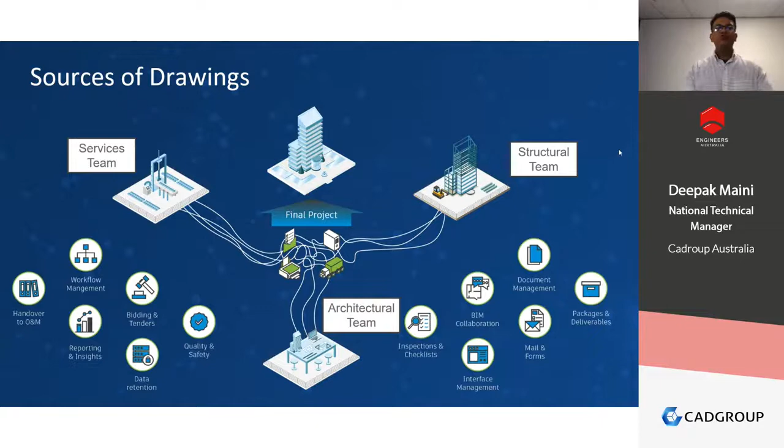The problem is they are not just the final documents. As I mentioned in my intro, construction is a really fluid state—we keep changing things around a lot. So let's say we've got a set of 100 drawings from the services team, whether mechanical, electrical, plumbing, hydraulics, and then the next day we get another set of 20 drawings because the information has changed. So it's not only the source of drawings that's multiple, it's also the number of drawings we get, and it's really hard to keep track of all that. Pretty much everybody in the project is confused as to which one's the latest set of drawings, whether we're working with the latest set, and so on.

And not to forget the confusion and frustration it brings when you're not working with the right set of drawings. In one of my earlier presentations, I mentioned that the construction industry loses over 60 billion US dollars a year because of rework caused by incorrect documentation sent on site. So the frustration it causes is massive, and it can't really be anybody's fault, because we don't know what happened—it's not our fault. So what do we do?

We need to come up with a solution to that. And what is the solution? The solution is Bluebeam Revu Sets. Now, what is Revu Sets? Revu Sets basically are a collection of multiple PDF files, organized, categorized, and displayed in a single view—so multiple PDF files that are organized and displayed in a single view.

Now, these PDF files could be located in separate folders. For example, you've got your project folder containing folders for construction drawings, architectural drawings, structure, mechanical, electrical, plumbing. So all these drawing PDFs could be sitting in different separate folders, and Bluebeam Revu lets you display them in a single view—like having those documents displayed in a specific sort order that works for you in your project.

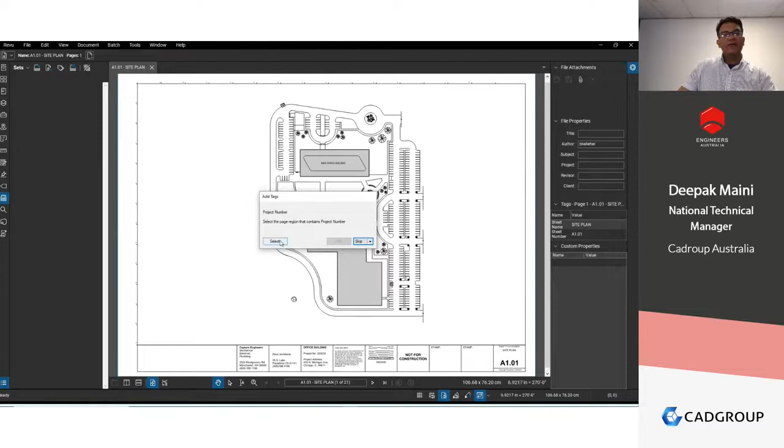As soon as I click OK, it now starts to grab the information from each of these drawings, and it says, OK, now tell me where the project number is sitting on the drawing so I could auto-populate that. I'm going to go and say I want to select the location on the drawing sheet. As soon as I click select, it says, all right, where is it located? This is where I can zoom in my title block to define where the project number is located.

I'm going to drag a box around this project number here. And now I can go and say OK. As you can see, it automatically runs OCR, optical character recognition, on the drawing there, and it reads the information automatically. I'll click OK.

So it has now come up with this information saying that these are all your drawings. They start with Rev 0. It has automatically extracted the sheet number and sheet name, and it's automatically extracted the project number from all of these sheets because the project number was sitting at the same location on all the sheets. But notice that there are no project codes. That's because project code is a manual field.

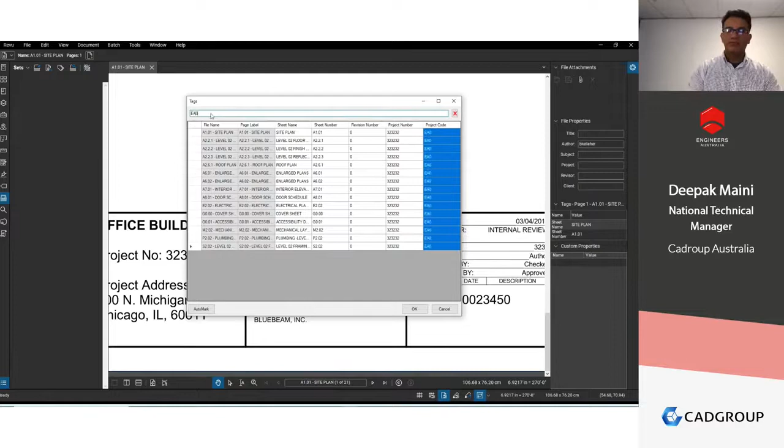So I can go and select all these drawings now, and at the top here I can enter the project code. So the project code for this one is EA032021. I'll go OK, so it has automatically added the information here.

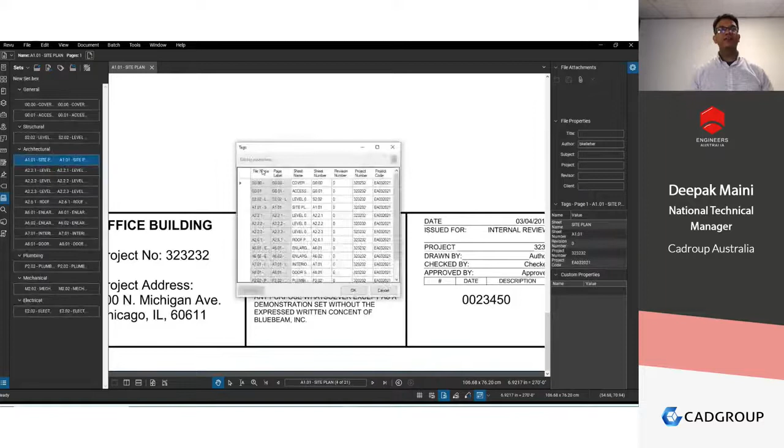As soon as I click OK, it now applies the tags to each of these drawings, and it goes and creates the drawing set for me. I'm going to go and say OK here, and here we go.

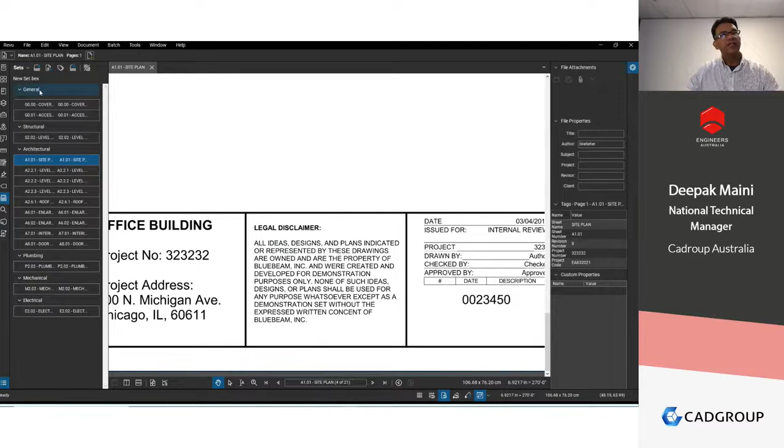On the left side of my screen, under the sets panel, I can see my categories here. So the general category has got 2 drawings. Let me actually close this because I don't want any drawing open for the time being. So the general category has got 2 drawings, structure has got 1, architecture has got all these, and so on.

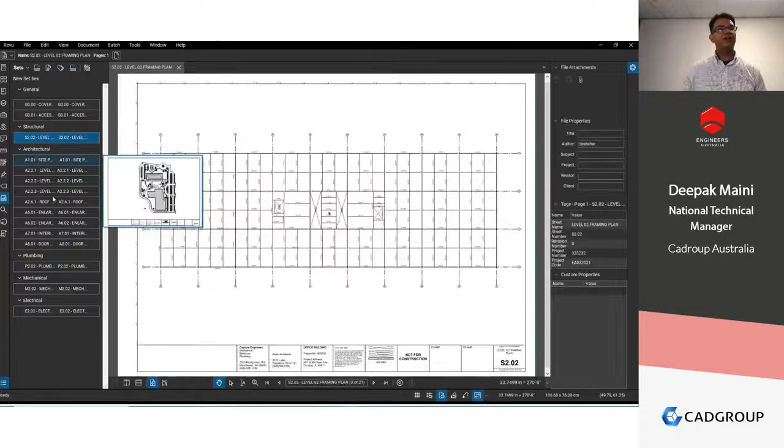So what it's basically given me now is an easy navigation panel, so I could go to any of these drawings. In one click, I can go and open the structure file. In one click, I can open this architectural file. One click, I can open plumbing, mechanical, and so on. So basically it is as if it was one single PDF file, although in our case, as you know, all these are separate PDF files sitting in their own folders.

So it gives me a really easy, simple way to access all my construction drawings, fabrication drawings, plant and mining drawings, and so on. It could be any kind of drawings. The whole idea is it gives you really easy access to all of those.

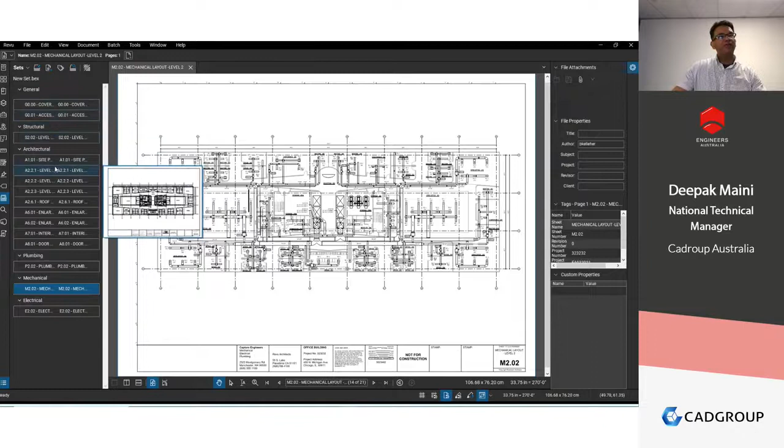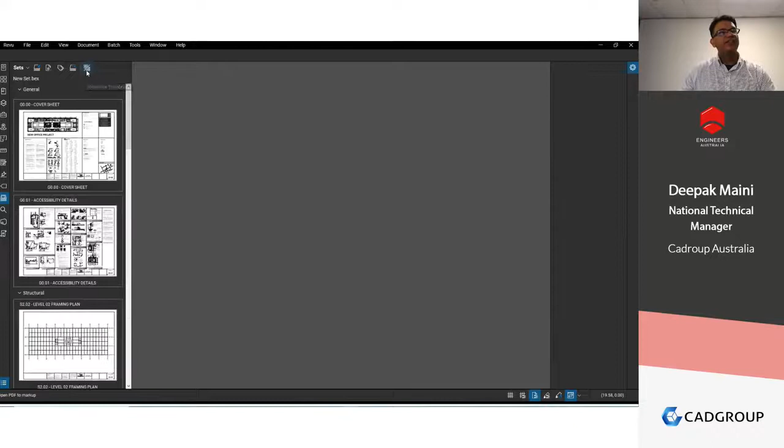Now, one thing I've noticed is I actually wanted my architectural, structure, general, and all these drawings to show a preview here as well, not just the names or labels. So in my set panel, I've got this little toolbar up the top, and clicking on this button here.

I can display these drawings as thumbnails rather than just the labels and names. How cool is this? And again, if you have lots and lots of drawings, you could have them displayed as labels and names rather than thumbnails. It is totally up to you.

The next thing I want to do in my drawing set is get my general category at the top. Then the second category I want is architecture. Then I want structure, then mechanical, electrical, plumbing. Right now they are not sitting in the right order.

I could have done this as part of my set creation process, but I thought I'll do it once I've created the set so I can explain exactly what I'm doing. I'm going to click this button that says 'what do you want to do?' You want to modify the set. It comes up with the same information, what does the set do, and I'll say OK.

Now if I go under options, I can go to categories. I'll say my first category is the general category. The second one I want is structure, so I'll click structure here and say move up, up. The next one I want is mechanical, then electrical, then plumbing.

And actually, if I've got some architecture ones, let me move architecture up as well, since I didn't move it up yet. And if I had some interior drawings, I'll take the interiors category and move it next to, or just under, architecture. In our case we don't have any interior drawings yet, but if we add any, they'd be displayed below architecture.

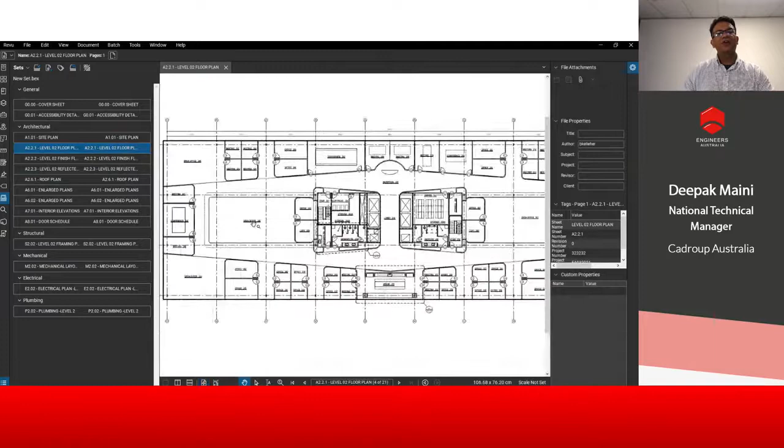Now let me just expand these categories. So what I want to do next is start marking up some of these drawings. I'm going to go into my first architecture drawing here, and use the really smart markup tools available in Bluebeam Revu to start marking up this PDF file. I'll go into my tool chest, and let's say I want to start with some engineer's review.

So I'll start with this Cloud+ markup. I'll go and create a cloud here and add some text: 'Please review this area and update based on the discussion.' Let me drag this somewhere here.

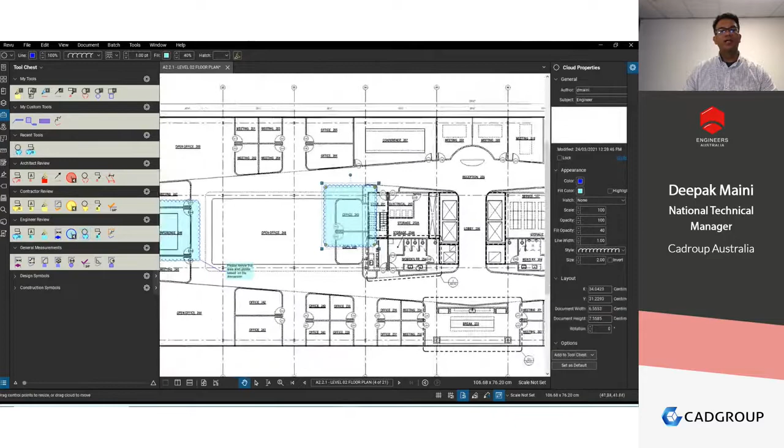Similarly, I can go and add a few more markups. I'm going to add a cloud-only markup here. I'm also going to add, let's say, just a rectangle. If I could grab one, otherwise I'll just go and add another text box markup, or sorry, a cloud plus markup.

Update the standards based on the BEP details, so BIM execution plan details.

Similarly, I'll go and add some contractor markups as well. Let's start with some cloud markups, and then I'm also going to add some cloud plus markups.

Change this to a kitchen, and so on. We don't want it to hide everything, so we want to highlight the area underneath. There we go. So we can now start marking up these drawings.

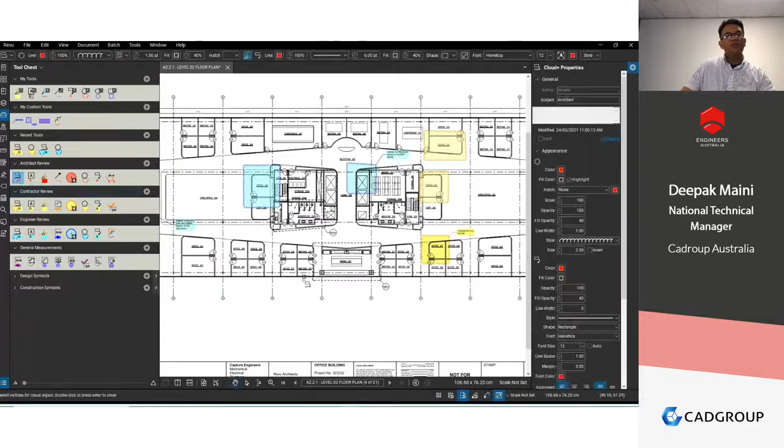Similarly, let me go and add a few more markups here. Let's go and do this one: add some details, refer to the images attached, or whatever it is.

Let's go and add some background color. So basically what we are doing is we have started marking up our PDF files. I'm going to save this file here.

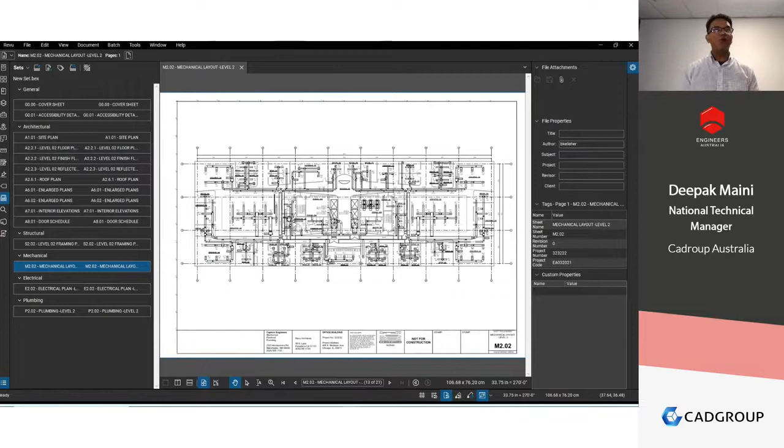I'll go into my sets panel and open the next file I want to mark up. Basically, I can really easily navigate between these files as if they were a single document, although in our case, they are saved separately in different locations.

Let's go and add some more markups here. What I'll do is I'll just use some of the recent markups and place them here without making too many changes to them.

Let's place this one here. Let's place this one here as well. Let's place another one.

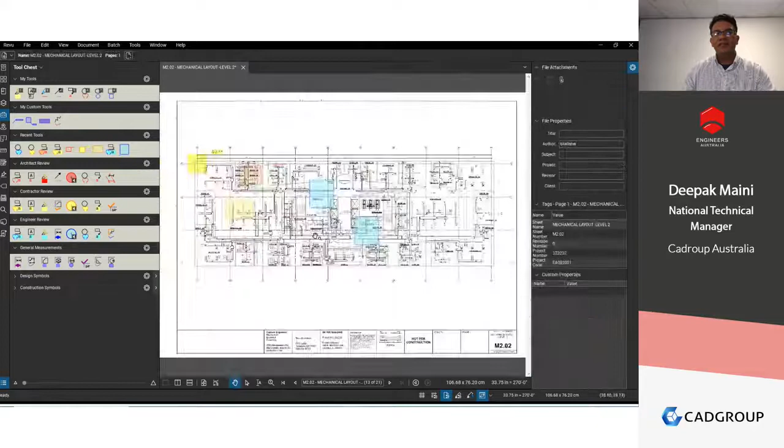So this way we can start marking up, as I said, our PDF files. I'll go and say save. This is all good. We are working with our drawings.

And now we have been sent a revised set of drawings. So I've got some architectural revised drawings, and a mechanical revised drawing or whatever it is. So what we do in that case is we simply go into our sets panel and click on this modify set.

Actually, we click on this button here that says add files to set. It again comes up with this message saying Sets will do this for you. I'll go and say okay. Now it asks, do you want to add them from SharePoint or my computer? I'll say my computer.

Now I'll go into the revised files and select them. I'm going to pick architecture rev 1 for this one, and I'll go and pick the revised mechanical file as well. I'll go open, and it says, all right, do you want to add tags because it can't find the sheet name for this one?

I could go and say select. Now, the reason it cannot find the sheet name for this revised mechanical file is because this is a different title block than the original one.

So the point I'm trying to make here is that although it could be a different title block, maybe somebody printed on a different sheet size and so on, your set will actually realize that, understand that, and give you the opportunity to go and pick the sheet name and sheet number again.

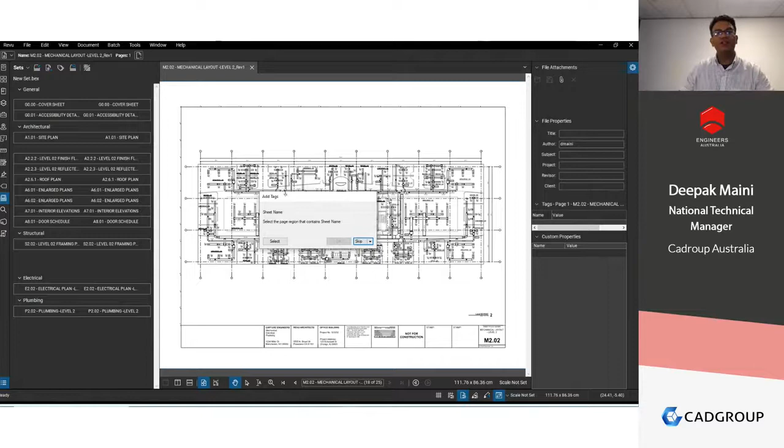So I'll go and just select. This sheet name actually is sitting here, which is different from the rest of the title blocks. I'll go OK, and sheet number is sitting here. I'll go OK, and then it creates this sheet, updates all the information.

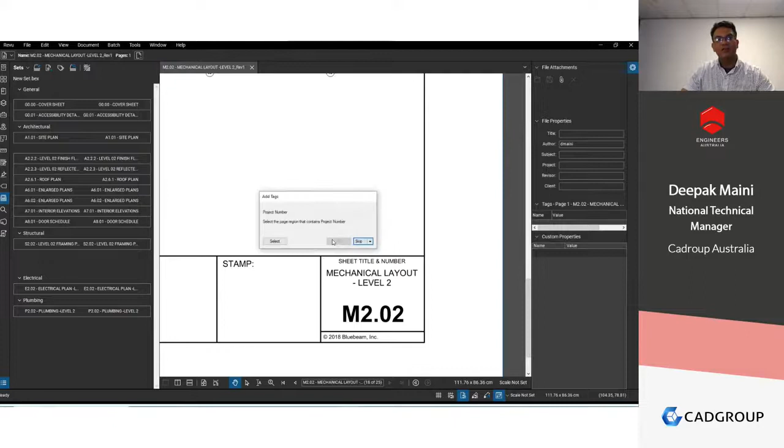Then it says the other information that is missing is the project number. I'll go and select again, and I can go and pick the project number. Now, let me just mention this one more time.

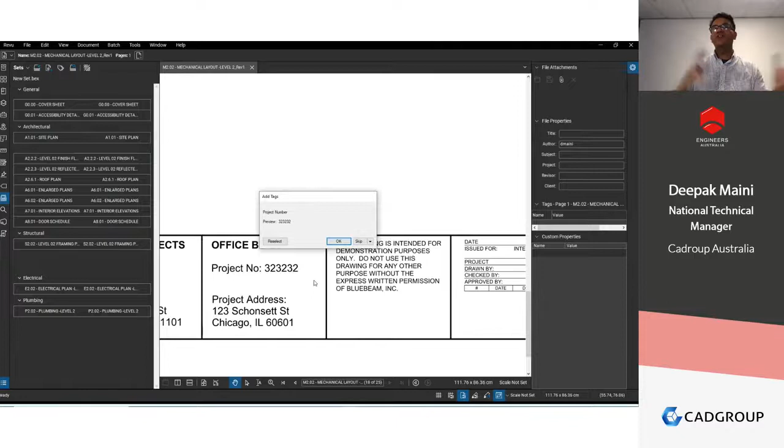The reason I had to do this again is because this mechanical drawing was printed at a different scale from the original one. So this is a different title block, different sheet size, and so on. Hence, we have to do this again.

So now what it basically is saying is that, yes, it has picked all these drawings, but a really cool thing you would notice is that it has automatically bumped the revision number of the drawing. Because it says there's a drawing that is the exact same with the same label, sheet number and sheet name, it has bumped the revision to this one.

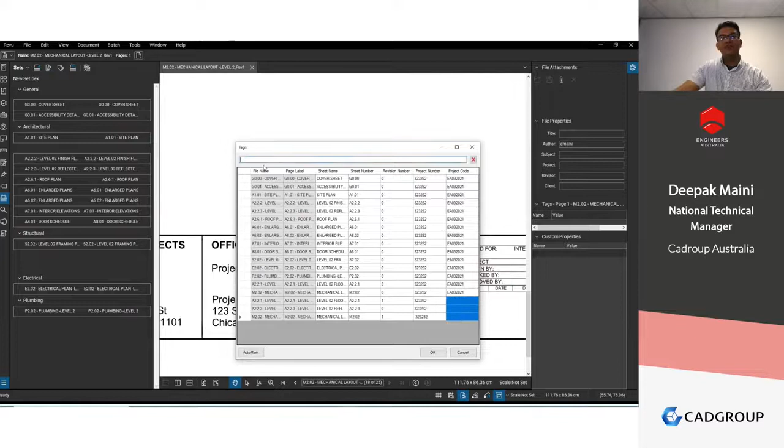I can copy this information which was manually entered and paste it here. I'll go OK. And as soon as I click OK, it now comes up with a message telling me that this file, which was the original file, now has a revised version. This file or sheet has a revised version, and mechanical has a revised version as well.

So it is giving us the opportunity to say that you had the original revision of this sheet. Now this is a revised version. If that was a mistake, you could go and pick any of these and say remove. But obviously, in our case, we are saying yes, we know that these are revised files.

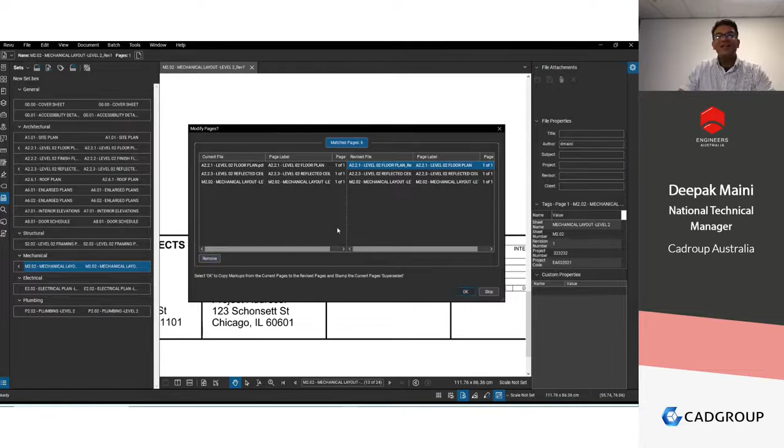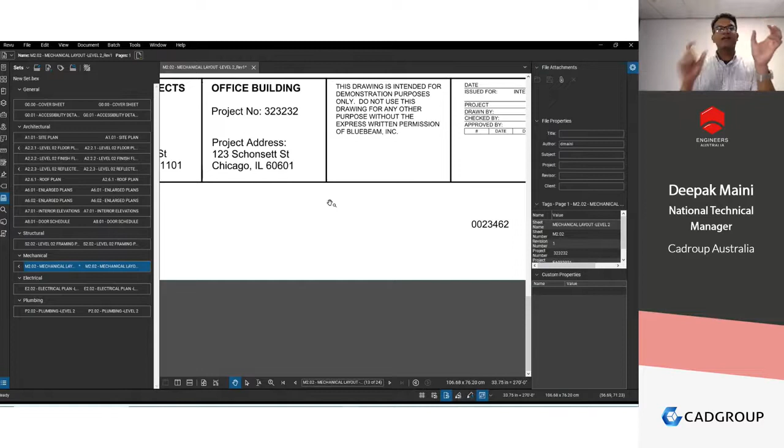We'll go OK. And as soon as I click OK, this is where the magic happens, and I get really excited about this. This is where the program knows that because the sheet name and the sheet number was exact the same, it has revised those sheets. Let me save this file and close.

Let me show this as thumbnails. It then places the revised sheet on top of your original sheet. And how do I know that? Because I can see this arrow here, which tells me there is a previous version of this. As soon as I click on this arrow, I can see the previous version, and it has added a stamp called superseded.

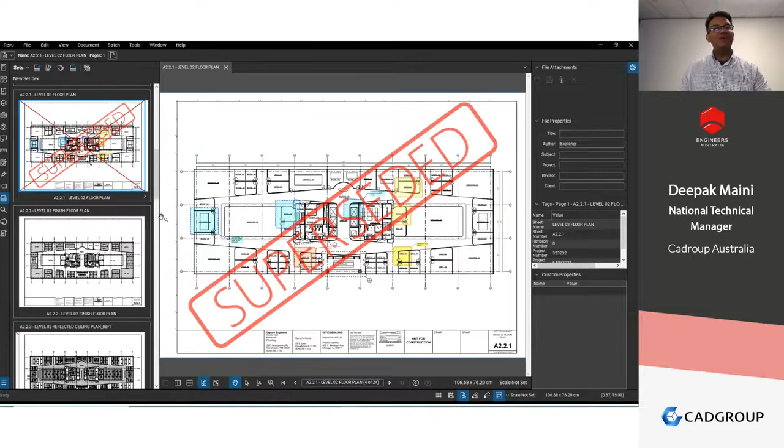But not only that, it takes all the markups that we added to this PDF file and displays those markups on the revised version file. So now I've got this Rev1 file and I can see all the markups here as well.

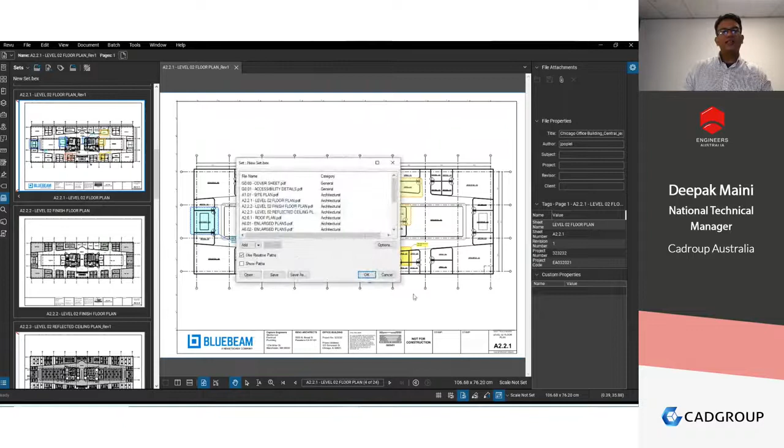Now, in some cases, you might not want to display these markups on the revised files. That's where you could go into your sets, modify set, and clear that checkbox that allows you to bring in all these markups. So if it is your final set of drawings, whether these are your final drawings or your as-builts, if you do not want to bring the markups, go into your sets modification, go under options, and clear the checkbox that says copy markups on newly added revisions.

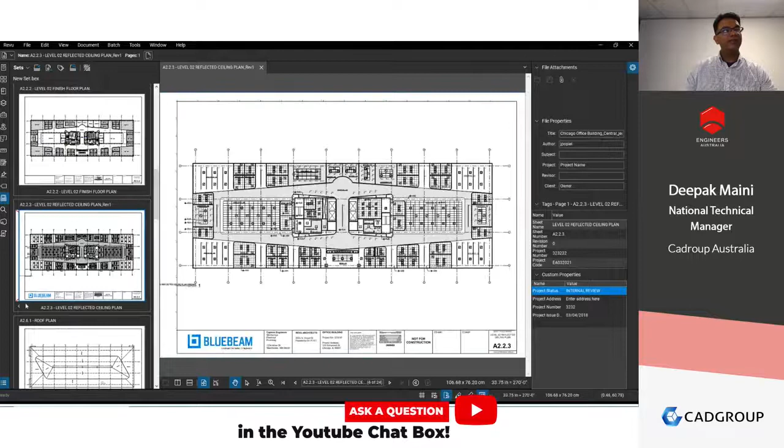That way your new revised drawings or latest drawings will be a clean set without any markups on them. Similarly, if I go down, I can see even for this drawing there is a previous version. I can click on it and confirm that's the previous version, which is now superseded. Similarly, if I go into my mechanical drawing, I would see the revised mechanical drawing as well, and the previous one now has the superseded information on it. How cool is this?

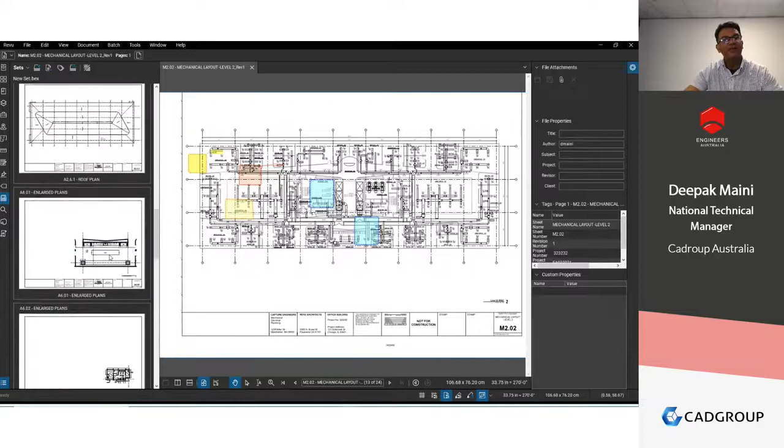So this is a really easy way to navigate through all my PDFs of my document set or drawing set, which could be your construction drawing set, your infrastructure drawing set, your plant and mining drawing set, or whatever it is. Although all these drawings are saved in different folders, we can easily navigate through all of them using this method.

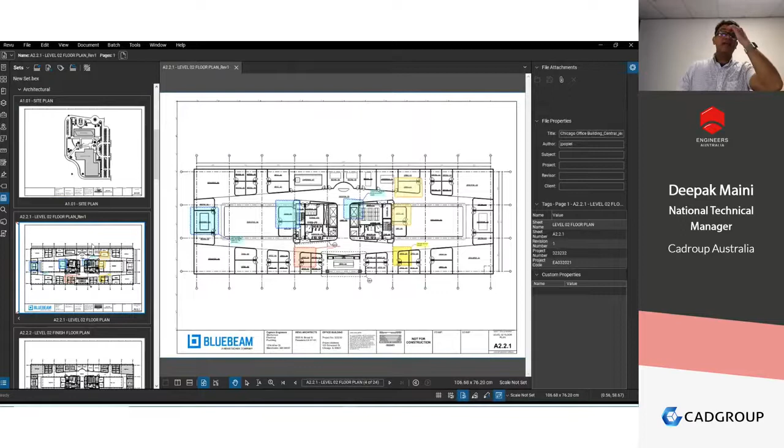Now, the other thing we can do with these sets is check what were the changes or differences between the files. I can right click on any document or sheet that has got a previous version and select compare documents. When I click compare documents, it says you're comparing this against this, and I'll say yep, that's fine.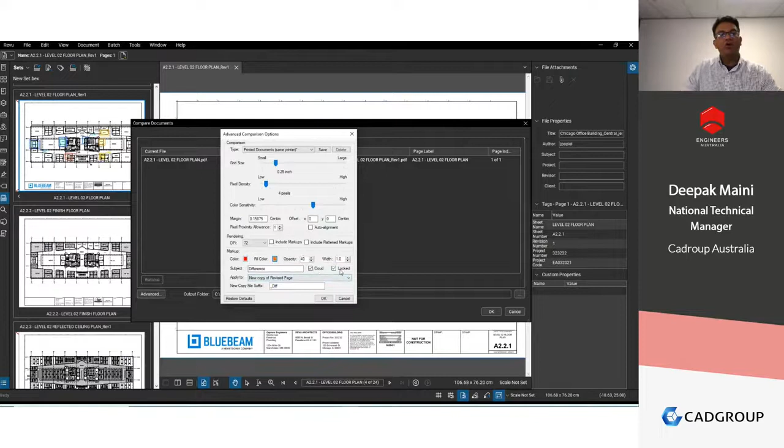But before I click OK, I'm going to go into advanced. I'll say I want you to create a new copy of the revised page with underscore difference as the name. I want the revision clouds created with red color, and a red fill inside with 40% opacity. I want you to lock all those revision clouds. As soon as I click OK and then OK again, it now creates the new revised version of the document, and I can see exactly where the changes are.

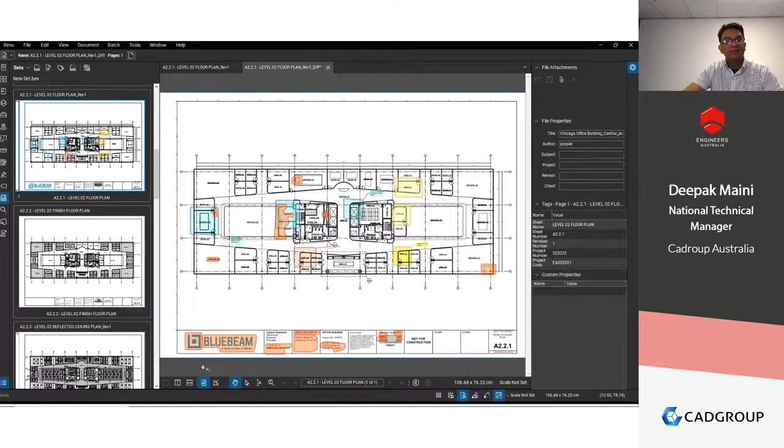So this is my revised drawing here, and this is the original drawing. What I might do is display it in a split view. In this window here, I can say show me the previous version. The whole idea is when I zoom into this now, it zooms into the previous version and I can see exactly what the changes are.

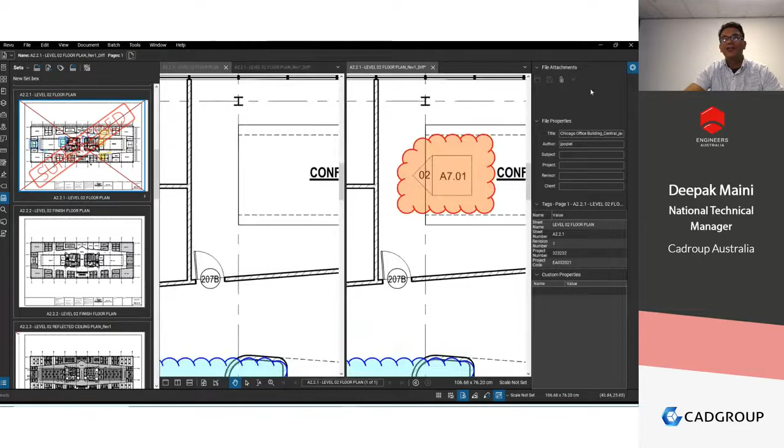How cool is this? Let me hide this properties window so you can easily see. It places it in synchronized view, and I can exactly see what the changes were, where the changes were made, and so on.

Isn't that really cool? This comparison tool is one of my most favorite tools of Bluebeam Revu, because it saves people so much time doing manual comparisons of your drawings.

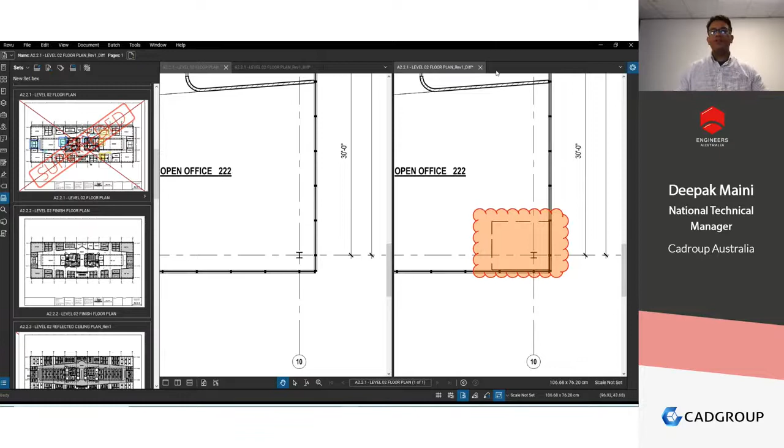Let me close this drawing. I don't want to save changes, so I'll close this without saving. All right, so this is how we can work with sets, but in this case, I'm working with sets in my local environment.

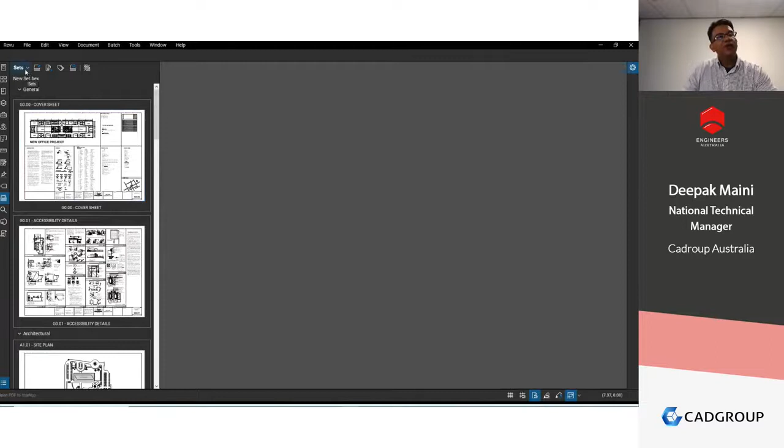What I want to do next is make sure I'm able to reuse this set, so I'm going to save it. To save the set, I'll go into the sets panel, click on the sets flyout, and select save set. It says unable to sign in because I don't want to save it on my SharePoint. I want to save it somewhere locally, so let's save my set here.

Let's call it EA presentation. I'll click save. What it's done is actually created that published set for me. It's saved the set for me.

Now what I want to do next is go and create a published drawing set log for my set. I'll click on sets, then publish, and select create or export drawing log. So I click on this and it asks, what information do you want in your drawing log?

I'll say I want my sheet name and sheet number - that's an absolute must. I want the revision in there as well. I don't want project number and project code, but I want to see whether the drawing is superseded, false or true. I also want to see what category that file sits in. And I'll go and say next.

It says, what format do you want to export your drawing log in? We can export it in XLSX format, PDF format, or CSV format. I personally prefer PDF format.

The reason I prefer PDF format is I can append this drawing log as the first sheet of the set. And when I'm creating my PDFs, it actually creates hyperlinks from the information in the drawing log down to every single sheet, every single drawing in my set. How cool is that?

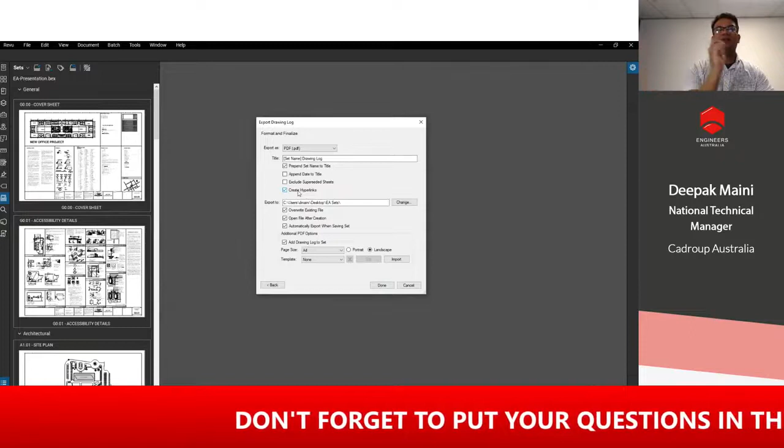What it also does is give me the opportunity to search for a particular drawing very easily. I'll simply click on my drawing log and search for a sheet number such and such. It straight away takes me there. I click on it and it opens that drawing sheet for me as well. I'll show you an example of that in a sec.

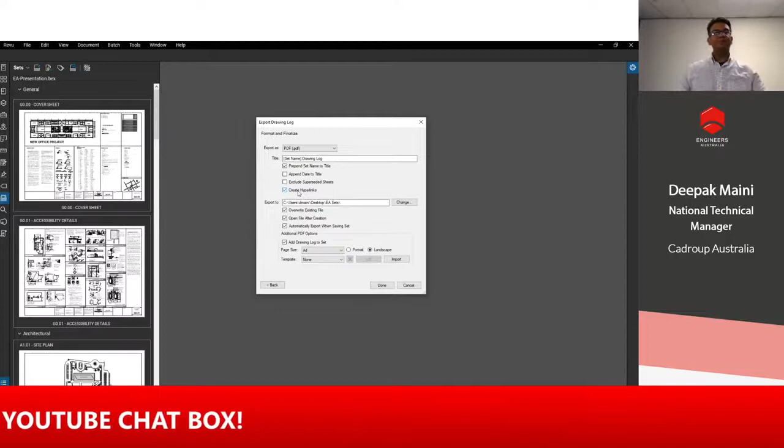It automatically names this drawing log based on the set name. Because my set is called EA presentation.bex, it will use that information followed by the text 'drawing log'. I can change this to whatever I want, but I'll leave it as default.

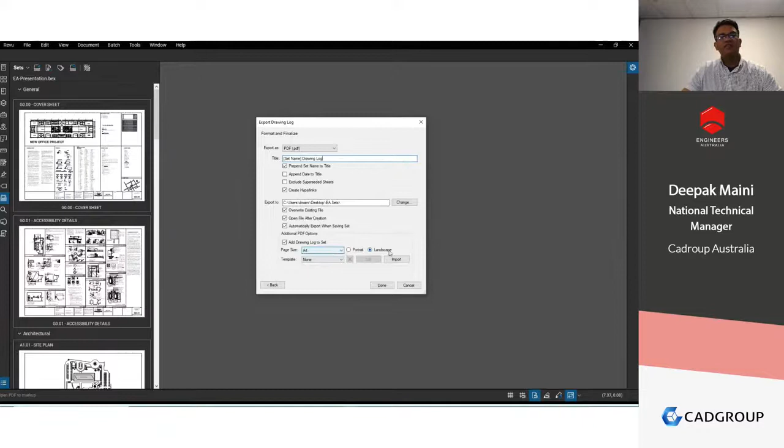You can decide to exclude superseded sheets - I don't want to, so I'm not going to select that checkbox. If there's already a PDF drawing log, you can overwrite it if you want. I want to use A4 size landscape orientation for my drawing log.

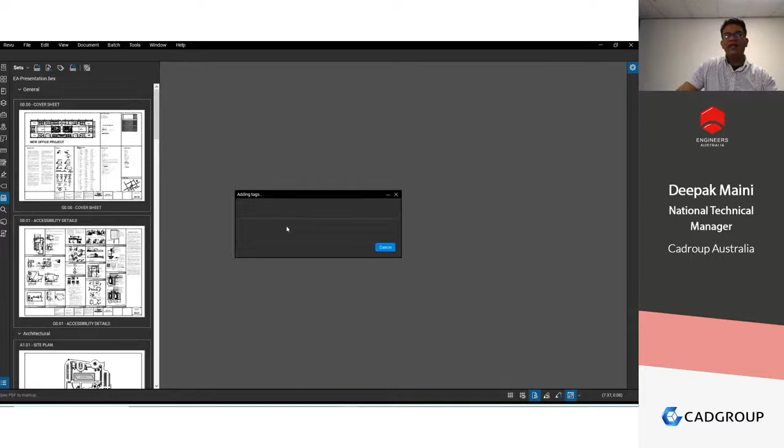As soon as I say done, it creates a drawing log for me, adding all those tags I wanted to display. It says the project number is not available in this drawing log. For this one, I'll say skip document because I don't want to display project number anyway, so I'm happy with this.

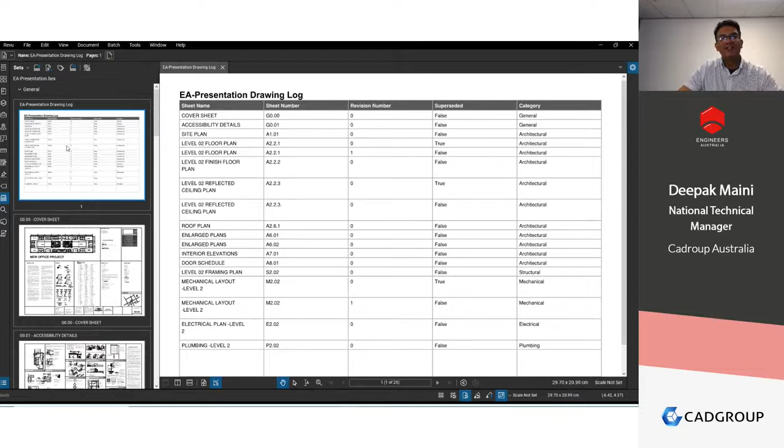As soon as I say OK, now I've got my drawing log created. Most importantly, you'll notice that the drawing log is automatically added and appended to my published set. How cool is this? This is my drawing log.

It gives me my sheet name, sheet number, and revision number. So it's telling me that this sheet here is Rev 1, and the mechanical is Rev 1 - this is the previous version, it's actually revised, and so on. I can see all that information here. It also gives me the categories that those drawings are in.

And as I said, the really cool thing - and I get excited about this - is it has hyperlinked the drawings in my set to this drawing log. So if I need to go to the roof plan, I can simply click on it and it opens the roof plan for me. How cool is that?

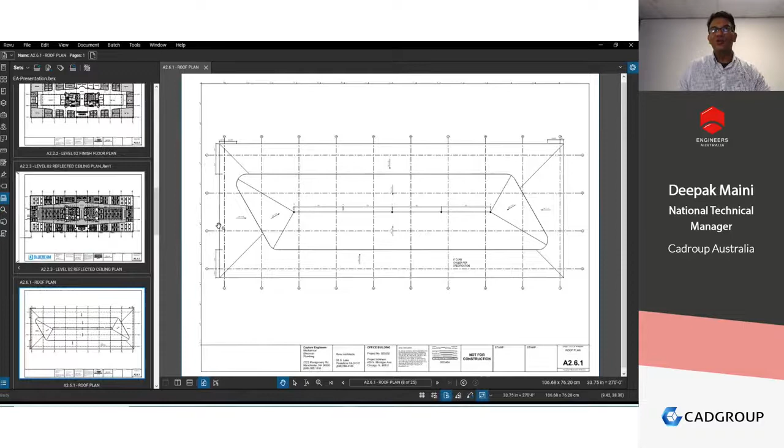Similarly, if I go back to my drawing log and want the electrical plan, I can click on this and it takes me to the electrical plan, opening it for me. But most importantly, let's say your drawing set has hundreds of drawings and you want to find a particular one, say with sheet number A7 or whatever - you could simply go into the search panel here, or use Control F.

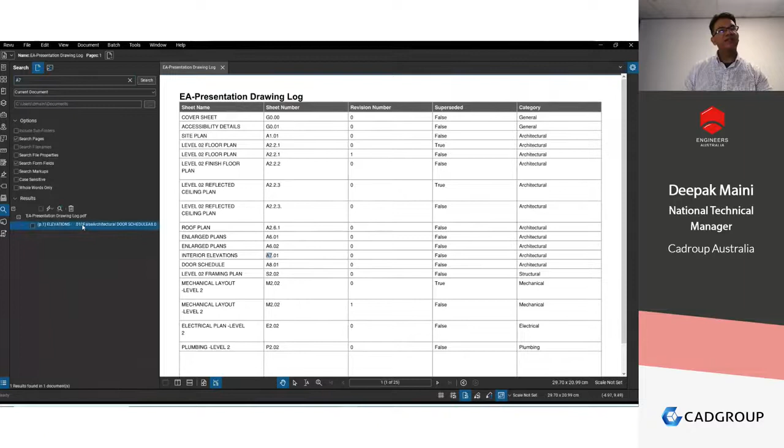It says what you want to look for. I'm doing a text search, so I'm going to look for, let's say, A7. As soon as I press enter, it goes and finds the location, tells me that there's A7 here. As soon as I click on A7, it opens that drawing sheet for me based on that text search. This drawing log is a really cool concept because I can have one single location for all my drawings in my set, and I can search for any of those drawings right here. Makes it really easy for me to search for those drawings as well.

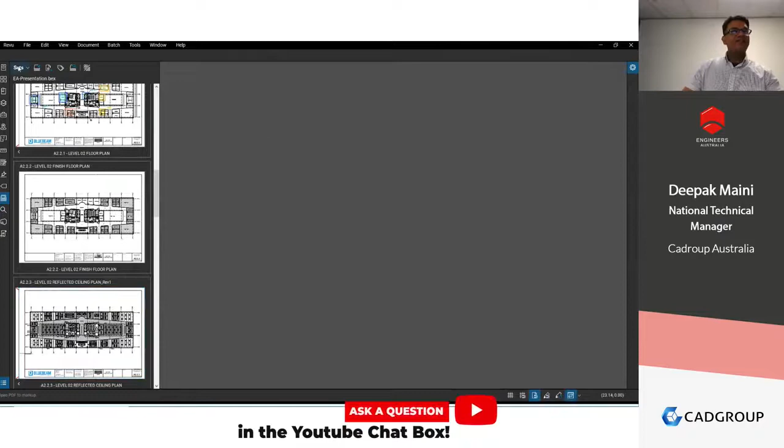And because these are hyperlinked, I can simply click on it and it takes me there. How cool is this? So now that we have created this published set, I'm going to save this set as well. So that's my drawing log.

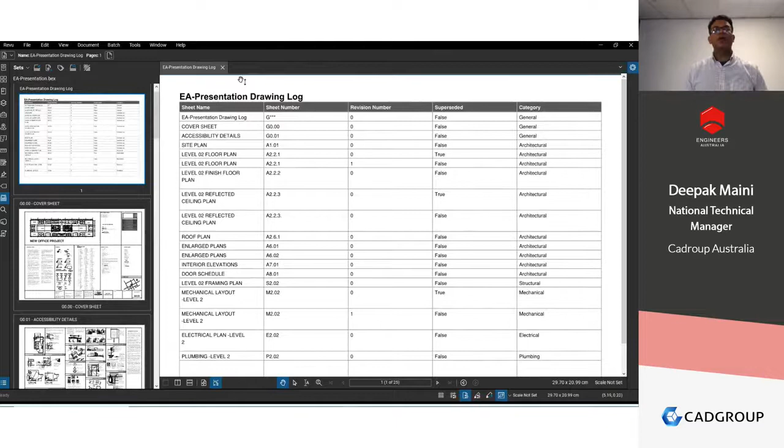I'm happy with this. What I want to do is currently this drawing set is sitting on my local drive. And when I saved my drawing set, the program actually went and created a file with the extension called BEX. That's my drawing set file extension.

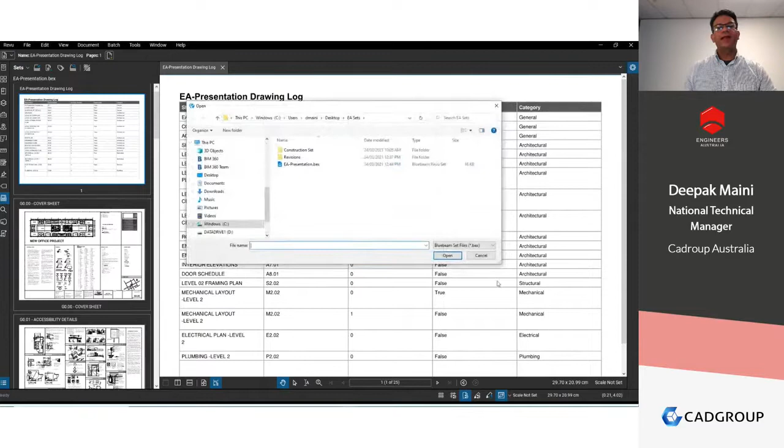So what I could do now is go and share this BEX file with the rest of the members in my team, provided they have access to this folder location. For example, if the folder location was saved on a network drive which everybody had access to, I would simply send them this BEX file. In their Bluebeam Revu, they would go into the review window, say open set, then open that BEX file, and they'll see the set on their screens as well. They don't have to do anything because the set's already created for them.

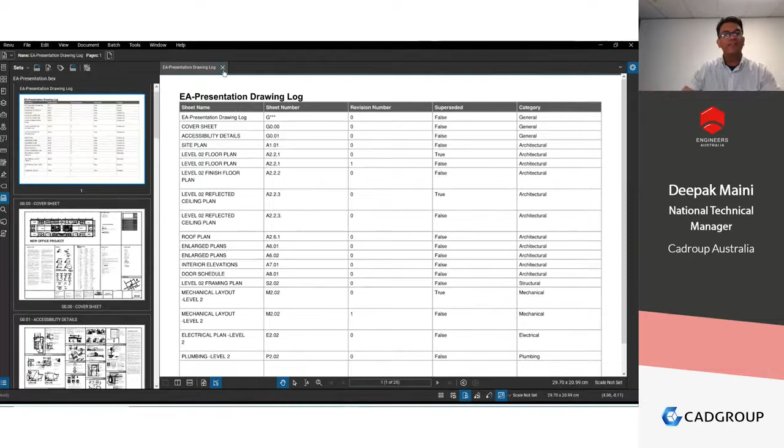However, if I want to share this set with somebody outside my team, with somebody in the extended team, this is where I can upload the entire folder onto my studio project. By uploading this folder, they'll open the BEX file and they'll be able to work with this set automatically. Let me show you an example of this. Let me close this log file here.

And I'm going to go into my Bluebeam Studio panel here. You'll notice that I can actually host. Let me sign out of this first so I can show you this. So I can host my studio sessions on the Australian-based server. As I mentioned earlier, if your projects have got sensitivity, so data integrity, data sovereignty and data residency is a problem, you can't host it on cloud servers located outside the country.

What I'm going to do is sign in. Hopefully I'll remember my password. Keep me signed in. Sign in here. There we go, so it signs me in. Now I can decide what I'm doing - am I working with sessions or projects? I'm going to go into Studio Project.

And now I'll go and create a new project. It asks what's the name of this new project. I'll say the name of this new project is EA Presentation Review. I'll click OK, and it now starts a new project.

A really cool way of working with these documents, although they're sitting in different locations, is that Sets gives you easy navigation to all these PDF files as if they were one single document. You have all the revised versions of the documents stacked here as well, just in case you want to look at which one was the previous version. But the really cool thing, as you can see here, is it marks these previous versions as superseded, which means there's no way you can actually make changes or add markups to those superseded files.

Also, when we bring in these revised versions, we selected the option to bring in all the markups from the previous version to the latest version as well, so we can continue adding markups. As I mentioned earlier, if you do not want to bring in the markups - let's say it's your final drawings, or as-built, or whatever it is that's not to be marked up - when working with your sets, you can modify them and clear this checkbox that says copy markups to newly added revisions.

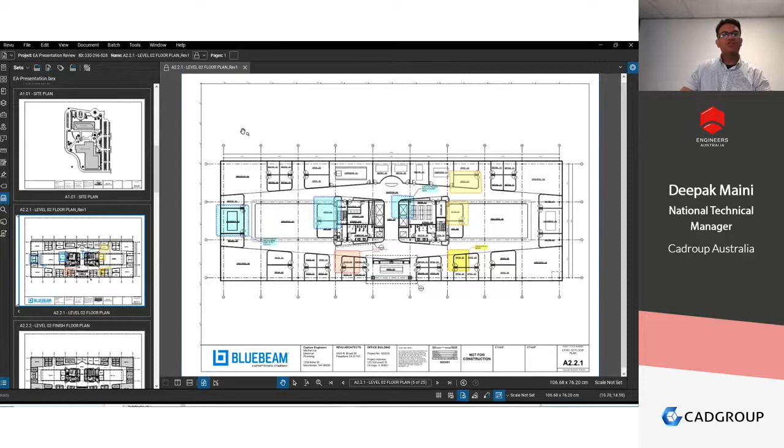So we are right on time. That was my presentation about Bluebeam Revu. I hope you found it handy, especially with the drawing logs and the hyperlinks and so on.

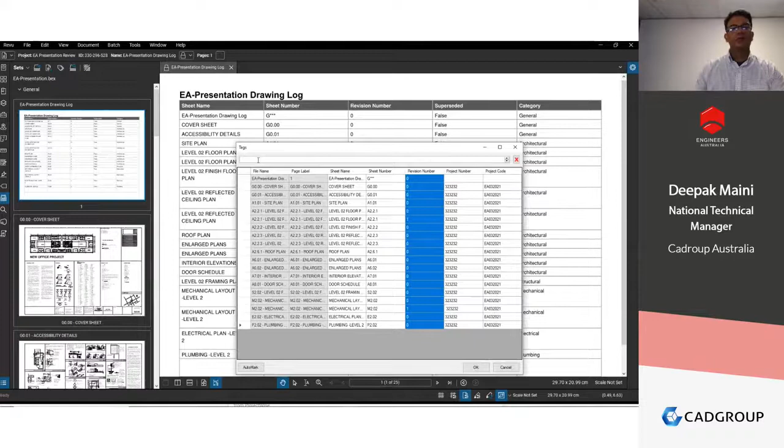But as I also mentioned earlier, if I go under tags, let me look at these tags here. You could take these revision numbers and decide to change it to Rev A or Rev 0 or whatever it is. In my case, because it is an automatic revision, it won't let me do it. But if it was set to off, you could decide to change it manually as well. The whole idea is that way it would not automatically bump the revisions.

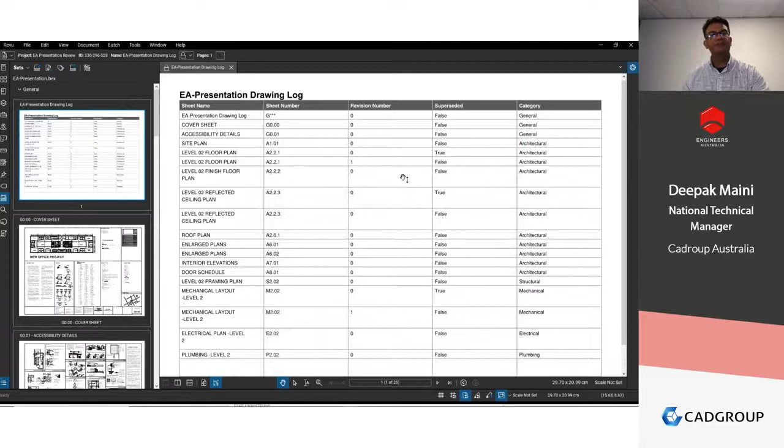Thank you. Question coming from Tim. Tim's asking about PDFs, and he's asking if someone else has a PDF open on another computer, will the set still open? And do I get a message that someone else has it open if I try to also open it?

Yes, the set will definitely open, because a set is just a document which has links to all those PDFs. Now, when you open the other PDF file, because it is currently opened by someone else, you will get a message that it is read only, so you will not be able to make any changes to it. Because at the end of the day, all it's doing is creating a link to that document. And when you open the document, because it's already opened by someone, based on your Windows security, it's the same thing as if you're opening a file outside the set and the file is already opened by somebody else.

Thanks, Deepak. We've had a question from Sandan asking about photographs. Can we add a photograph when reviewing on iPad, for example? Take one or multiple photos on site and embed them on top of the respective file.

Absolutely. So yes, when you're using Bluebeam Revu on iPad, either using your Review app or View app depending on what it is, you can take a photograph and attach the photograph to the PDF files. Yep, no worries.

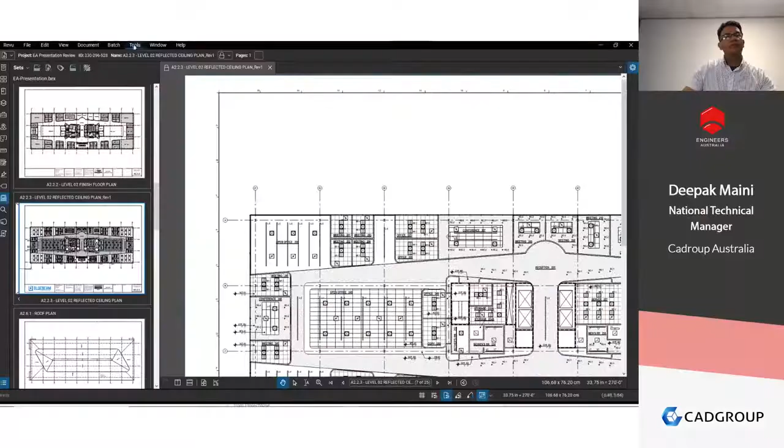When you take photographs, you could also have those photographs added manually. For example, let's say I was emailed a photograph by someone. If I go into my program here, I could use the image tools. If I go under tools, and under markup, because this is open through my set, I'll go and close the set, since this is the set I opened from my studio session. So let me go and open the set that I saved locally. All right, so this is the set that I saved locally.

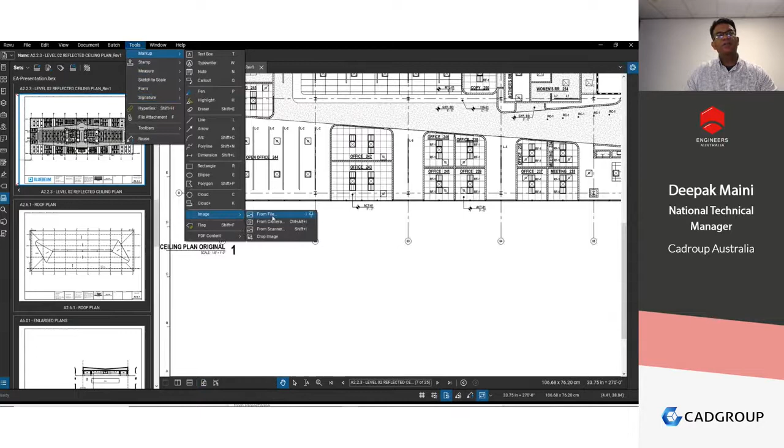So let's say I went on site and I've taken a photograph that I need to attach here. When I go into my markup tools and select image, I can now attach the image manually on the PC as well. But if you have this information on your iPad, you could do that too. So let's attach an image from here. Let's say this logo—actually, let's pick something else. Image from file. Let's go here, let's go in here.

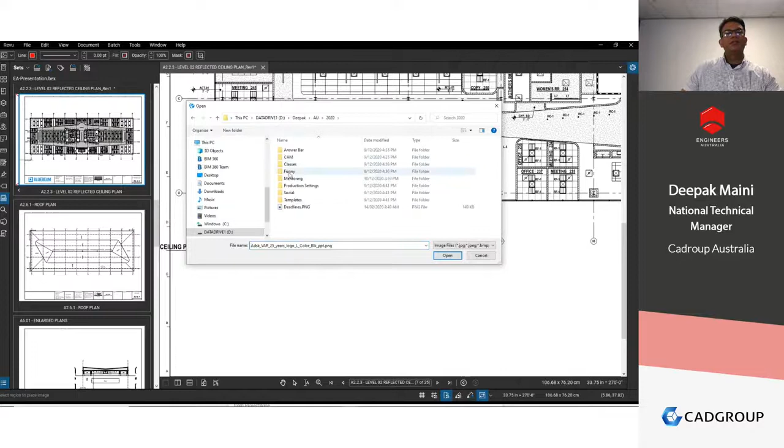Let's go and pick. I like this image here. How BIM managers work, how cool is this? Anyway, so I can attach this image here, no problem.

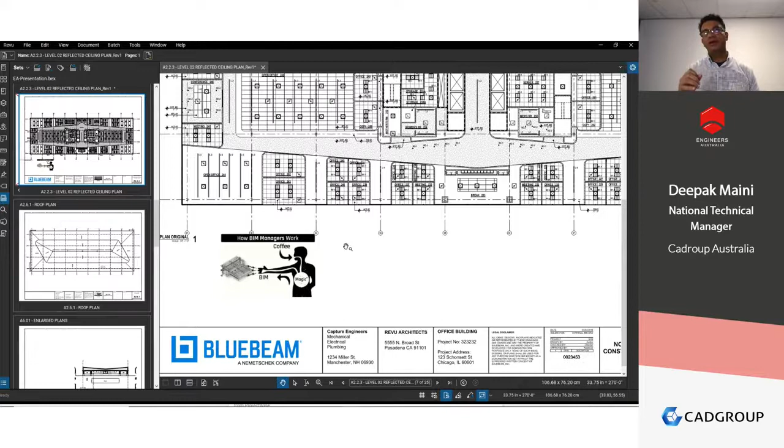Now, one thing I do want to mention is that at this stage, sets is not supported on iPads. So if you've got sets, you can't use them on the iPad app. Please be mindful of that. But attaching an image is not a problem, and it could be outside the sets as well.

Thank you. We've had a question around performance. The question's come in, Deepak: how does Bluebeam perform compared with other PDF editors?

Bluebeam is not just a PDF editor. Bluebeam is a program that lets you create, markup, compare, edit, and collaborate on PDFs. So Bluebeam is not just an editor, it does a lot of other things. When it comes to editing features, Bluebeam Revu has got some really, really good PDF editing features, and it compares a lot better than some of the programs out there, hands down. Not just because I'm wearing a Bluebeam hat right now.

As I mentioned at the start of the presentation, we are trusted advisors for our customers, and we always try to give them the right information based on the current scenario. So it is one of the best programs out there. I even saw somewhere that 70% of the general contractors or tier ones in the US already use Bluebeam Revu. It's a really good program, especially for the AECO industry - architecture, engineering, construction, and operations. And obviously in that industry is also shipbuilding, infrastructure, mining, and so on.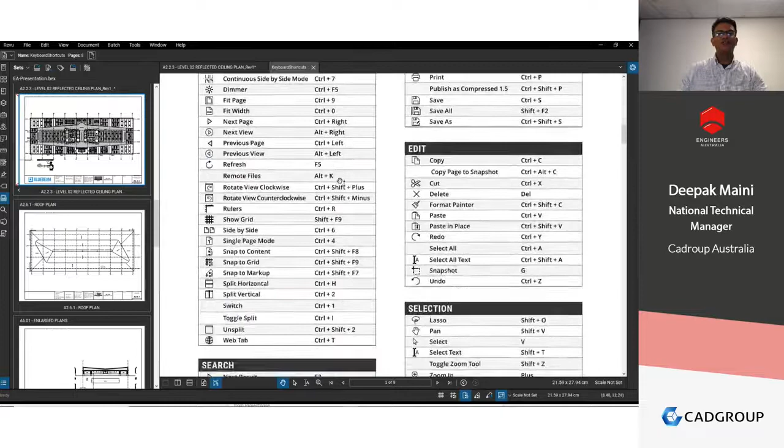A really cool thing is that you can also modify the shortcut keys. If I go into the Revu menu on the top left, I can go to Keyboard Shortcuts, and it shows me all the different keyboard shortcuts here. For some reason, if I need to modify a keyboard shortcut of any of these tools, I can modify it here, provided that shortcut isn't already assigned to something else.

For example, for my ellipse tool—actually, let's go to the arc tool—I want to create a shortcut called A. But as soon as I type in A or Shift A, it says that it's already assigned to something else. You can see this here. So what you could do is change the other shortcut to something else, and then assign this one here. So you can modify this.

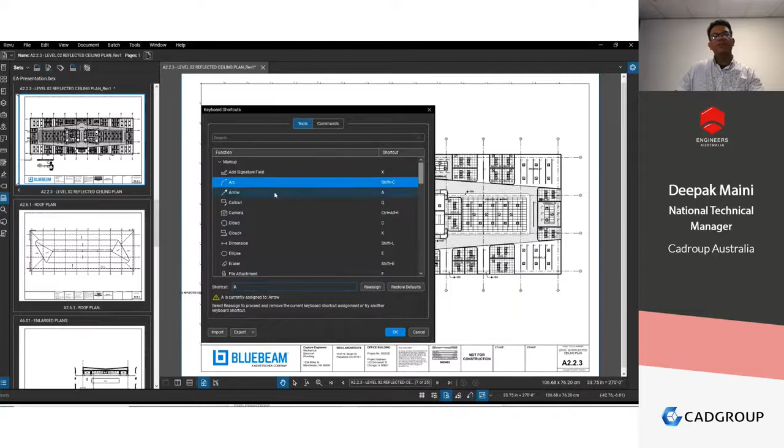You can also export these shortcut settings. But as I mentioned earlier, you can go under Help, Keyboard Shortcut Guide, and that's your guide to shortcut keys. So Deepthi is just like me—I don't like burning my calories going all the way up there to pick commands and so on. I prefer using shortcut keys.

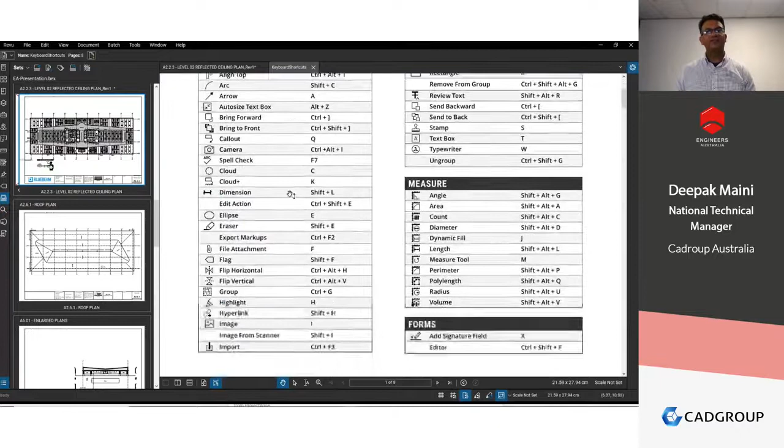And by the way, I might add one more thing I mentioned earlier answering another question: Bluebeam Revu is one of the most user-friendly packages, because every time Revu wants you to do something, it displays that as a prompt sequence on the bottom left corner. For example, if I activate the text box tool by typing the T key, on the bottom left corner it tells me to select a region to place the text box. So it displays the prompt sequences here.

The only thing to remember is that the prompt sequences are displayed on the status bar, which by default is not turned on. But if you go under View, and then under Tools toolbar, you can turn on the status bar here—F8 is the shortcut key. Once you've turned on the status bar, you can save this as your profile as well, so every time you fire up Revu, the status bar will be there and you'll be able to see all the prompt sequences.

Thanks, Deepak. I just get so excited about Bluebeam Revu—it's such a cool program, it's got such amazing features, I just get too excited about it. Well, certainly with my lockdown experience, I think I'm looking forward to burning some calories.

We're getting so many questions through, which is fantastic, so I'm trying to group a few together. We've had a few questions around: how can I share a single or multiple marked up drawings from the set without sharing the full set with revisions?

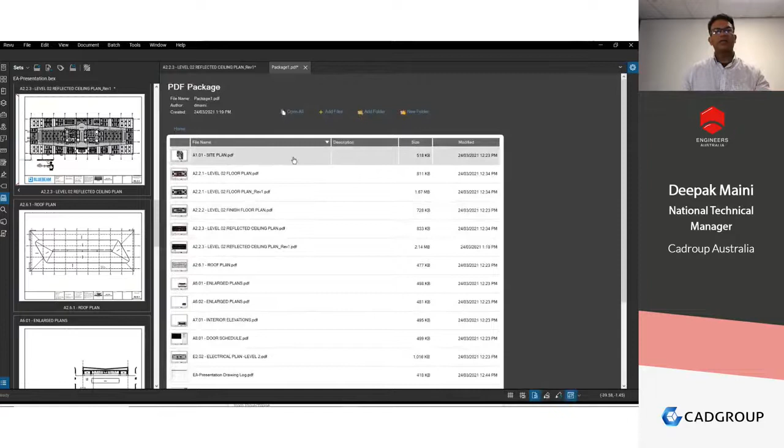I can also go and say publish, and create a PDF package. Creating a PDF package basically lets me create this package, and there are a lot of things we can do with it, but it comes with all these hyperlinks as well. As I said, normally what I use is this option called print latest revisions.

Thank you, we're trying to get through as many of these questions as possible. The next one's coming from Daniel. Hopefully, Deepak, you could decipher this question. Daniel is asking, will a document look the same as those drawings, and in inverted commas, will the superseded stamp be done on all pages, etc.? That is correct.

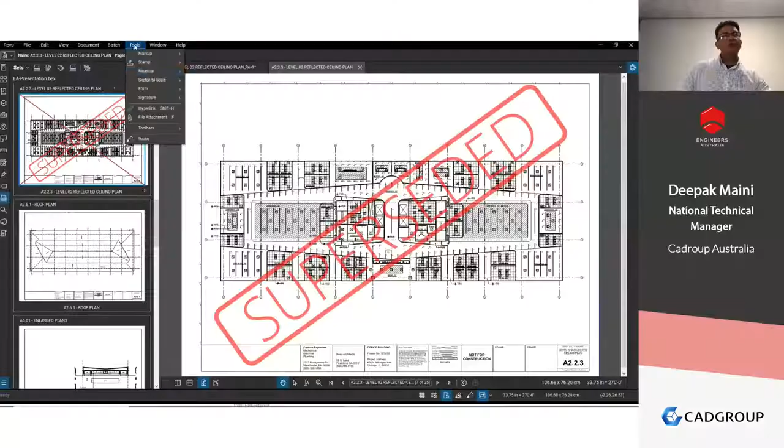So all the old versions would come with this stamp called superseded. If I go under Tools, Stamp, there actually is a stamp here created called superseded, which is what it's using. You could create your own custom stamp, or you could modify this stamp to decide how you want your superseded stamp to look.

So all the superseded pages will look like this, provided you have selected the option to stamp those superseded drawings, and that is all in your review settings. If I go under options, you can decide not to stamp your previous versions as superseded by clearing this checkbox here.

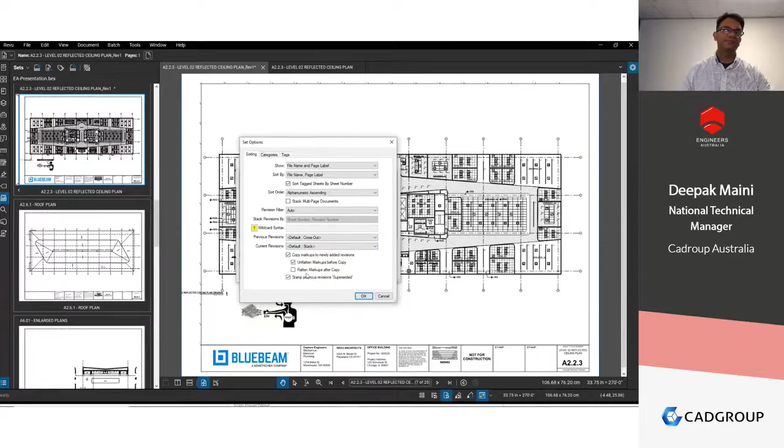We've had a few questions around drawing management, and the question is, will the method of drawing management be applicable for other file management? Brilliant question. So Bluebeam Revu only allows opening of PDF files.

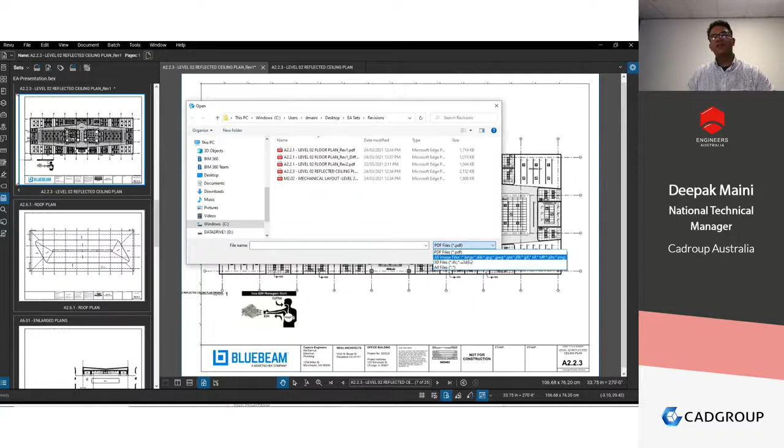There are a lot of other files. For example, when I go to the file open command, let's go into file open from my local machine. If I click on the bottom right corner where it says PDF, I can open image files, 3D files, or change it to all files. Some files, such as image and 3D files, when you open them, will actually convert into PDF files. So management within Revu will have to be for PDF files.

However, when you're working with studio projects - let me just say no, I don't want to save changes - Studio Project is your lightweight document management system, and you could have any file type uploaded here.

So I could literally go and upload, for example, if I go into my desktop and into project, I could go and upload a CSV file here. I can upload a Navisworks file here - let me upload the whole folder for the Navisworks file. So the drawing management through studio projects could be for any file format, you could upload any file format on studio project.

However, when you're opening a non-PDF file, for example, if I go to the Navisworks folder and check out the NWD file and open it, it will open that file in Navisworks software installed on my local machine. Similarly, if I go back and check out this CSV file and double click to open it, it would actually open this file in the Excel program on my machine.

But what happens is, if I go and make some changes to this - I want to change this wall closeout symbol from CO to WO - I can save this file, close it, and when I check this file back in, I can add some comment here about changing the wall closeout symbol.

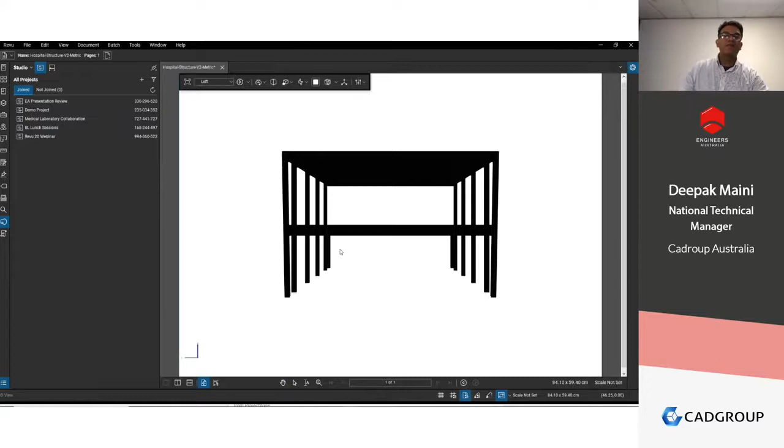Let's say I've got this IFC file here. When I double click on this file to open, it comes up with a dialog box letting me add some views. So I'm going to add some views here, and the sheet size I want to use is A1, landscape. What this basically does is convert that IFC file into a 3D PDF.

Let me change the visual style. If I go and say illustration, as you can see, this is now a 3D PDF file that I can spin around. Because Revu would only let you open PDF files, in this case I opened an IFC, but it converted that into a 3D PDF.

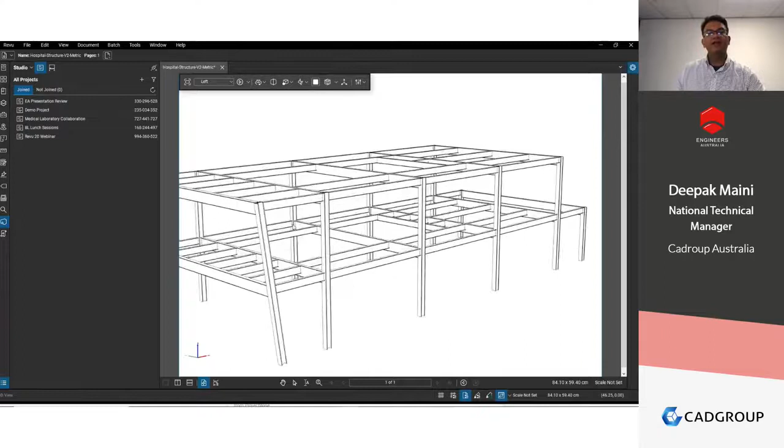A really cool thing is if I go and pick on any of these elements, I can also look at the properties of this element here. And then I can also show my 3D panel, the 3D model tree. As soon as I click on any of these elements, it highlights that element here as well as in my 3D model tree, and gives me the information about that element.